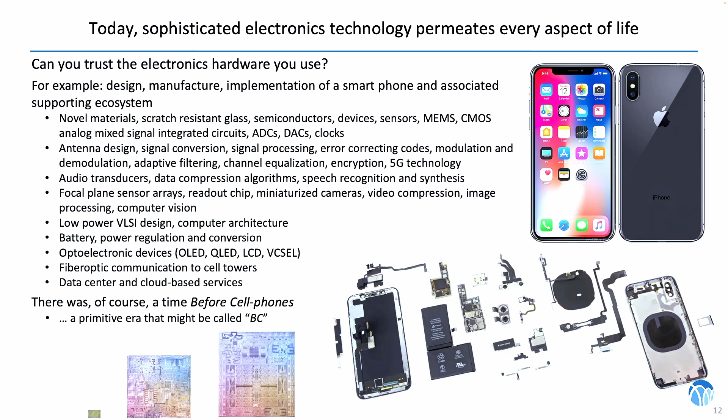So a lot of that is built on the success of integrated circuit technology. And so I show you in the bottom left-hand side here a little chip that's an example of leading edge circuit design that we did at USC, and next to it is the M1 and the M2 chip, also designed in leading edge technology by Apple. The larger chips contain billions of transistors.

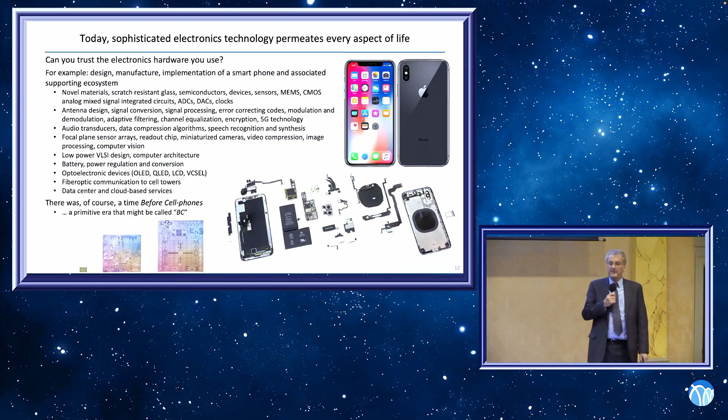And so when it's manufactured out on the Pacific Rim, how do you know that the manufacture has taken place according to your original design and that something else isn't in there? So that's going to be one of the ideas that we're going to pursue. And it's an idea that the government was interested in as well. And so we worked a little bit with them, but mainly we brought this forward in other ways.

So in terms of effort today, I want you to start understanding numbers. So length scales. To understand the sort of miracle of the state of the art in integrated circuits, you have to understand these scales. So human hair, which you can actually see, has a diameter of somewhere between 60 and 120 microns. Now you might say, what causes that range in diameter? Well, it depends on the color of your hair. So those of you who are interested can explore who has the larger diameter hair.

The human blood cell is about 5 microns in diameter. So you can't really see a single individual cell that easily. But larger cells are bigger. Now, let's look at something that is very important in technology, which is the glass fiber. So a silica glass fiber, this example here is a Corning single mode fiber, the SMF-28e+, which has got a 9 micron diameter.

That is the little 9 micron core, which is slightly germanium doped. And then the diameter of the actual glass cladding, the glass around it, is 125 microns. That's something, again, that you can see with your naked eye. And in fact, this particular glass fiber has been cleaved. You can see where the scratch mark was made, and then that fiber was cleaved. And then it was imaged in a scanning electron microscope, and that's the image that you see there with the 25 micron marker.

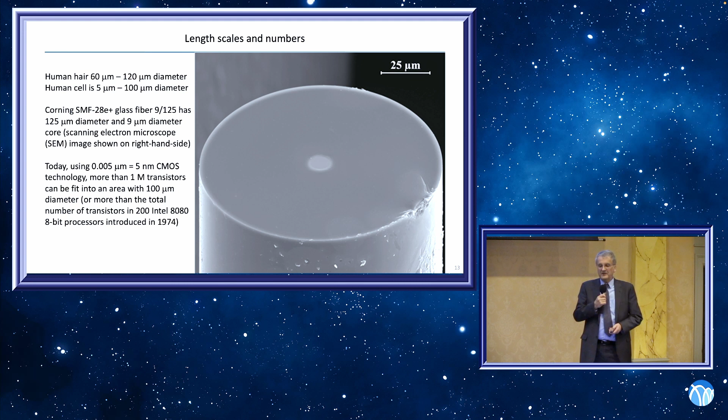So think of that. You can get 200 of those in that face, in that cleaved face of a glass fiber. It's awesome. It's absolutely awesome where we've come from in the technology. Here's another way of looking at it.

Along the horizontal axis, you see year on a linear scale, and up the vertical axis, on a logarithmic scale, you see minimum feature size of transistor. And so you see, when I started work at Bell Labs that Larry had mentioned at the introduction, the minimum feature size was 2 microns. This has decreased exponentially over 45 plus years, and now we have 5 nanometer minimum feature size transistors being produced, corresponding to 130 transistors per square micron.

Think of that little fiber and the core of the fiber, and then say do something that's 10 times less than the small, 100 times less area than that core you saw. I can fit 130 transistors in that.

On the vertical axis here, you see again, this is 6 micron technology that was used by Intel in 1974, had 4,500 transistors and a clock rate of 3 megahertz. And now there's been an increase in the transistor density of greater than 500,000, an increase in the clock frequency of greater than 1,000, an increase in the word length of 8. So you've got a 10 billion times increase in performance if you just multiply those numbers together.

From a national security point of view, in 2020, actually it was obvious many years ago, but the government finally woke up to recognize that the US, shown here with a little American flag, had a transistor density disadvantage relative to manufacturers that were very close to mainland China. And this turns out to be a threat to national security because you don't know what's going on in countries that are 60 times closer to China than the US.

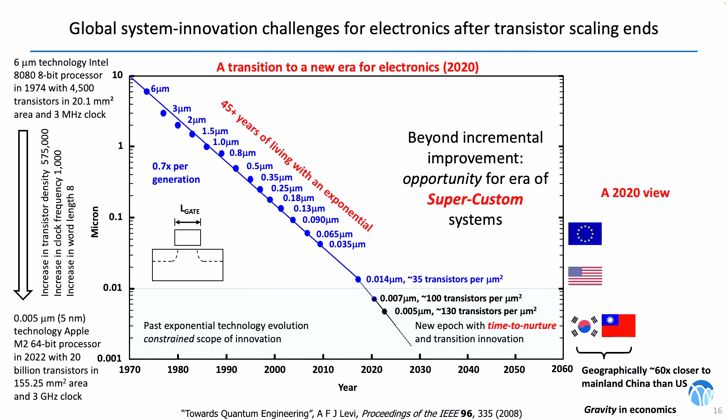So these were all concerns, and yet opportunities there to go beyond incremental improvement and a new era of super custom, where there's a time to nurture and transition innovation instead of it being crushed by the old paradigm of Moore's law. Now, given that background, do you trust the electronic hardware you use? You ought to be a little skeptical.

There's lots of opportunity for malfeasance. There's other types of technology being developed that you might want to investigate and reverse engineer. You'd like to understand more about what is going on 6,000 miles away. And it starts off on a larger scale. Here's a chip that is being packaged in Vietnam from Intel Corporation. And you look at the packaging.

This is conventional packaging, it's an Intel microprocessor, and you look at what's inside the package without opening it up, without destroying it. And this was work that was done in Switzerland using a medical imaging technology. The size of the voxels used was rather large, so the resolution was rather poor, but you could test at the package level that the connections were correct and that the various support components were in the right place.

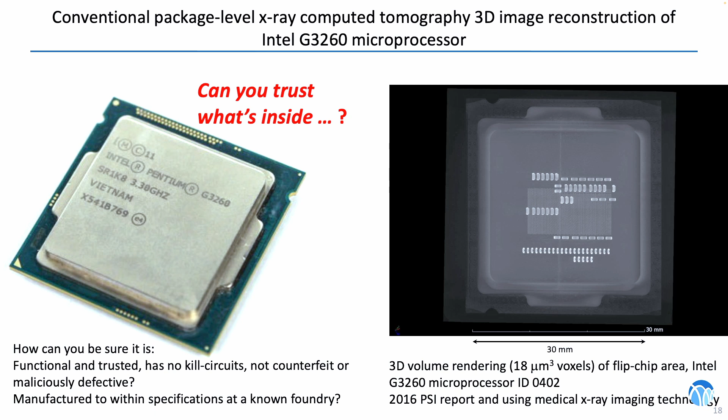So let's look at the conventional approach to discovering what's inside a chip. Let's look at a chip that's manufactured on the Pacific Rim, and it's a few millimeters on a side, and it's got some solder bump pads on the front surface. How do you find out what the metal interconnect layers are? How do you find out where the transistors are? How do you figure out whether it has been manufactured according to your design?

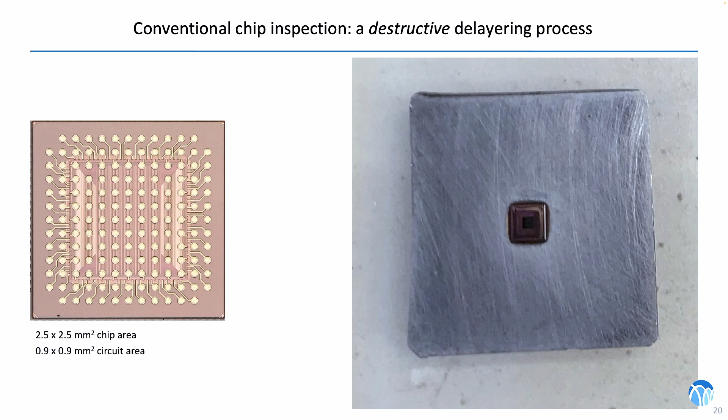Well, the way that's done currently is a destructive delayering process. You mount that chip that is on the left-hand side on a block, as you see on the right-hand side, and then you start grinding through the layers. So it's a destructive mechanical polishing to delayer the chip. The chip is made up of electrical conducting layers that are interconnected with vias. This is a slow process.

And you see here I started off with an optical microscope image of the complete chip, 2.5 millimeters on a side, grinding through those layers, looking a little closer where the solder bumps are, and you go through that, and you can look in the SEM, and you start looking at some higher level metal interconnect. Way down at the transistor level, just above the transistors, is the first metal layer of interconnect. Here it is.

You see those railroad tracks running horizontally from side to side? They are 500 nanometers apart. And then the little connections that you can barely see are connecting individual transistors. That's called the M1 layer, metal 1 layer. The next layer up is called M2, and so on. There's M7 shown.

The problem with this is you have a chip, and there's only one shot at getting this right. You mess it up, that's it. You can't go back and reinspect. Oops, I was more interested in this. I want to find out what happened. Too late, it's done.

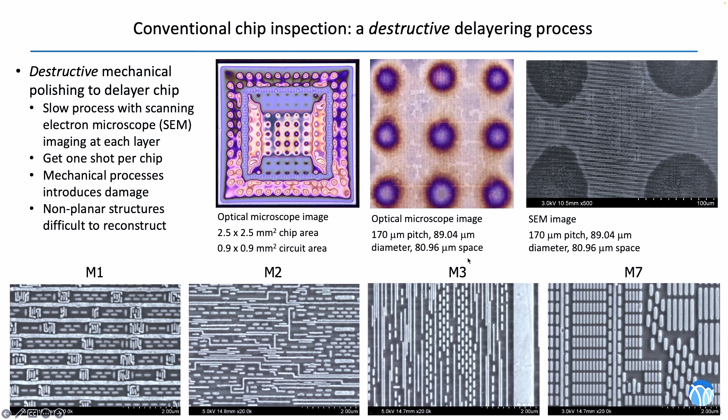So this has lots of negatives associated with it, including you can't go back and redo, and that as the minimum feature size gets smaller, the metal layers get thinner, and so you don't have these pretty pictures anymore. You have to reconstruct pieces which are not planar surfaces, and they go up through multiple layers, and that becomes a real bit of a nightmare. So this destructive delayering process is not optimal. It's slow, and for non-planar structures, such as the more modern transistors, it's very difficult to make the reconstruction.

So what we want to do is a non-destructive chip inspection using, in this case, coherent X-ray 3D imaging. So we can look in 3 dimensions at what is actually being manufactured. And let's see if we can do that. Well, yes, of course we can. This is an efficient way to do it, and we want to get down to 1,000th the scale, the resolution that we were using before. So it's a big step, and this work was published a couple of years ago. I'm going to show you in a little while.

This is a work that involved putting together an incredible team of people. I can say a few words about that. Finding the humans and the resources to do this is actually a delicate task. I spent a good part of 2016 traveling around X-ray facilities in the United States and abroad. And after interviewing a number of engineers, came to the conclusion that a national lab in Switzerland was the best choice for our team to work on this project. And it turned out to be very good. So Mirko and Manuel were key members of that team in Switzerland.

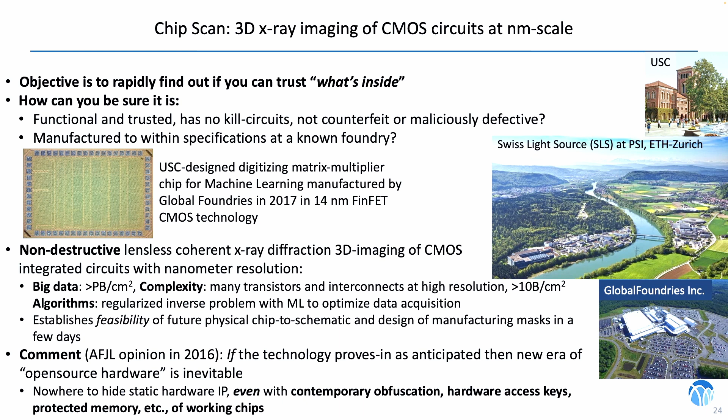So in understanding the next steps, let's start off with ptychographic 3D tomographic reconstruction. A lot of fancy words for something that I'm going to hopefully explain rather easily. The traditional way this type of X-ray imaging is done, you have a coherent beam of X-rays, which you focus onto a sample, and the sample is shown here. In this case, you have cut out a 10 micron diameter pillar, and you can see here some metal layers for a rather legacy technology system.

And you run the X-rays horizontally through these layers, and you rotate the sample with the beam fixed, and you collect diffraction patterns. So the coherent X-ray beam diffracts from the metal layers and produces an intensity pattern that is picked up on a focal plane array of detectors, that is the diffraction pattern that you see here. So the diffraction pattern at the detector is the two-dimensional Fourier transform of a projection through the sample and corresponds to a cross-section of the 3D Fourier transform of the whole object.

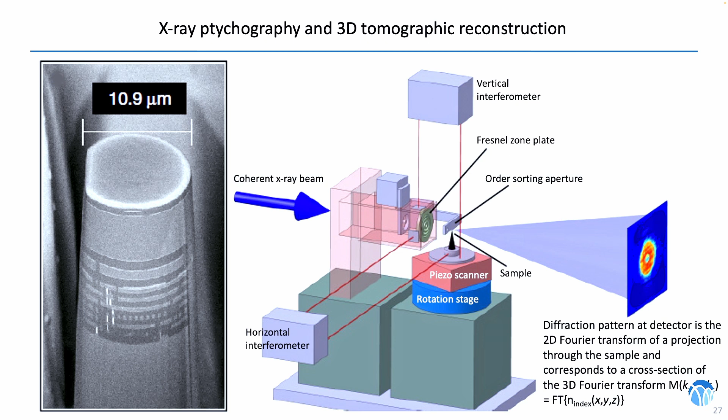Now, the challenge of reconstructing the image of the 3D object is the challenge of finding the field and the phase at this plane just given the intensity data. And so this is an inverse problem, and the only way to proceed is to take many such images and rotate the sample and collect the corresponding data, and then do the inverse problem on this.

So while you're thinking about that, let me show you something in Global Foundries technology that we started working on. So this is showing a similar cylinder, but this happens to be something from Global Foundries. The design is shown here in 3D. So the design is made up of photolithographic mask layers, showing here the first few layers in the process of manufacturing a chip. You start off at the bottom and you start working up. And I'm just showing layer 3 through 10, where layer 10 is the M1 layer, the first metal layer above the transistors.

You can synthesize all of this and model it by taking the mask layers, knowing the thickness and the materials, and figuring out what the 3D object should look like in a model. We haven't done any X-rays yet, we just created a model. And we're already working quite hard, in case you're worried.

It turns out it's a certain type of circuit for testing. For those of you who know about circuits, you'll recognize this immediately. This is the metal 1 layer in the photolithographic mask, and if you take this cut in red and you now plot it out in 3D on the right-hand side, you see what the actual metal in yellow looks like in 3D, and lying below are other parts of the process, including implantation and so on.

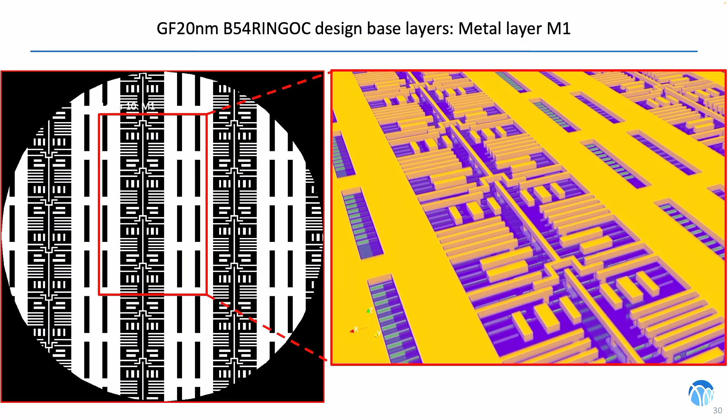Now, we can do a fly-through through this cylinder of the synthesized object, and this is what it looks like. So you see I can fly in like an architect flying through a new design. I can fly in through my design in 3 dimensions and look for those patterns of metal interconnect on the first layer, and I can see them.

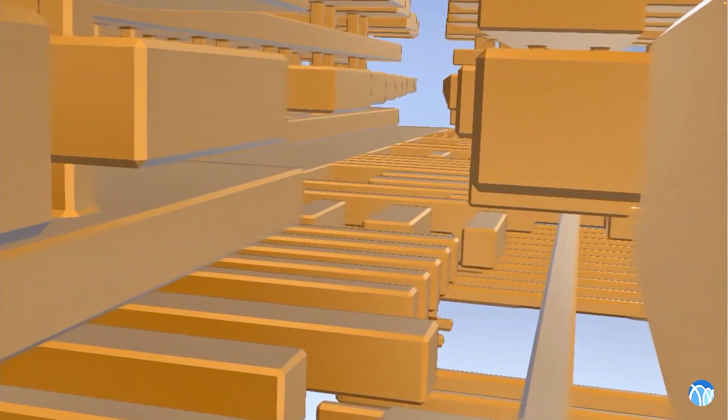I hope you can see them. It may be you think of the Jetsons or something in some cartoon, but this is actual 3D rendering of a design of a transistor circuit. Not the measured case, but the design.

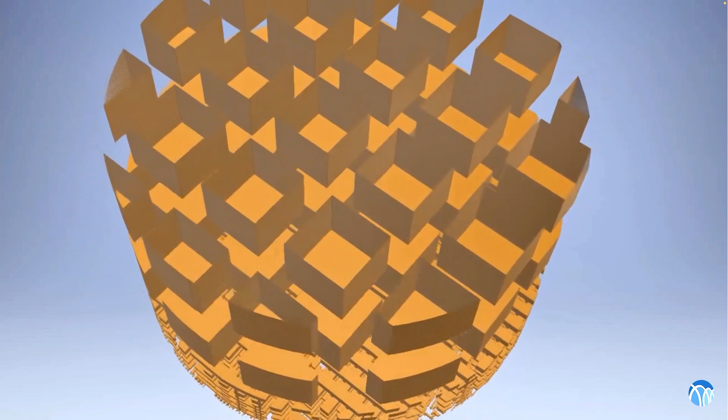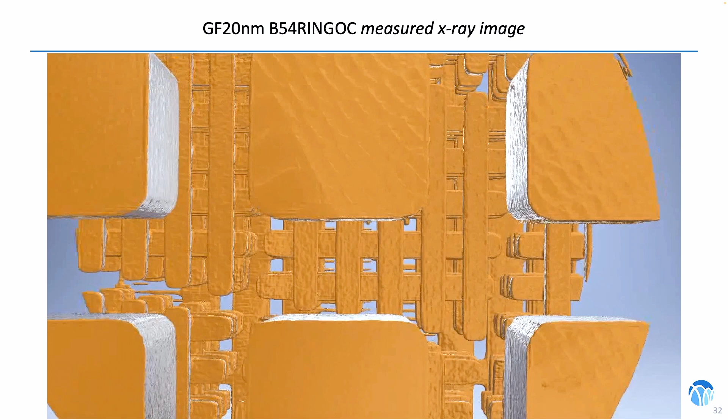So knowing what the design in 3 dimensions should look like, we now want to go away and measure it using X-rays, using the established method that I had shown you before. And so this is the result of that inverse scattering problem, showing you a fly-through through the same thing. So we go through the upper layers, we dive down towards the lower layers.

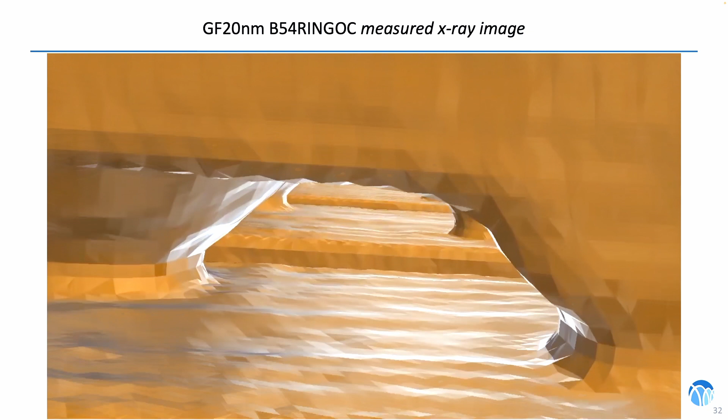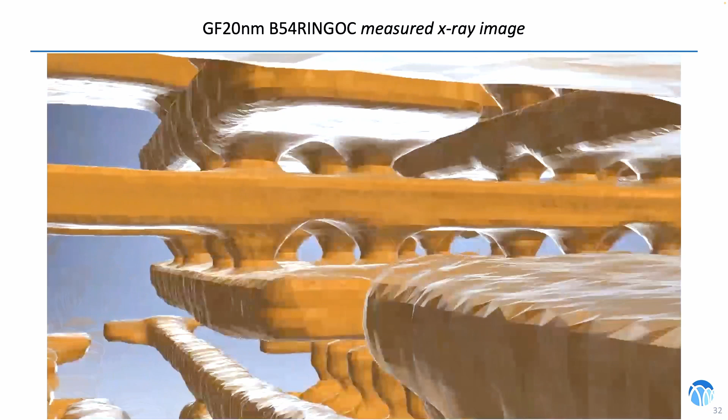You look to see the vias connecting metal interconnects. You see those vias, and eventually you get down to the metal layers; this is the metal 1 layer. I, of course, recognize it. You may not. And given our proximity to Hollywood, you can imagine at USC we had lots of fun figuring out how to generate these videos from the X-ray data after we had done the inverse problem.

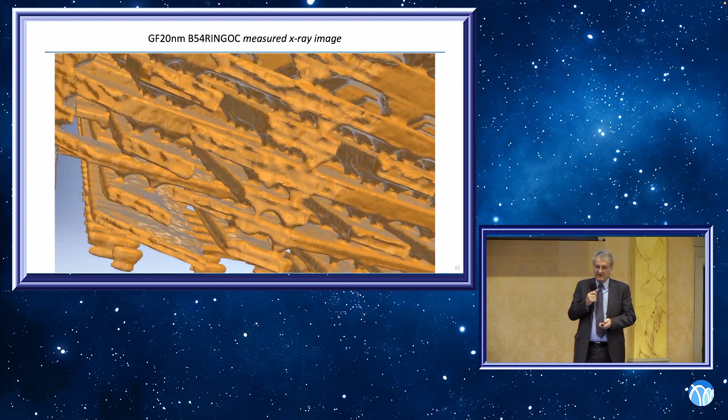So this turns out to be the copper metal interconnect in a circuit from Global Foundries, manufactured in a 20 nanometer process that we have there. So not only can you get the 3D image, you can then slice through it and reconstruct the photolithographic mask by taking a layer, in this case the M1 layer, and reproducing the mask.

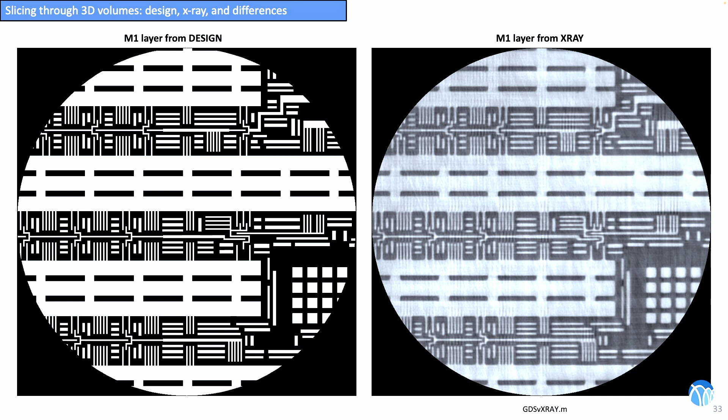So on the left-hand side, you have the photolithographic mask. On the right-hand side, you have the delayered, imaged M1 layer that's actually been manufactured, and you can look at the difference. You have the design file, and you have the imaged data, and the little red lines on the left-hand side are where the boundaries ought to be according to the design, and the black and white is where it's actually measured, and the difference file is shown on the right-hand side.

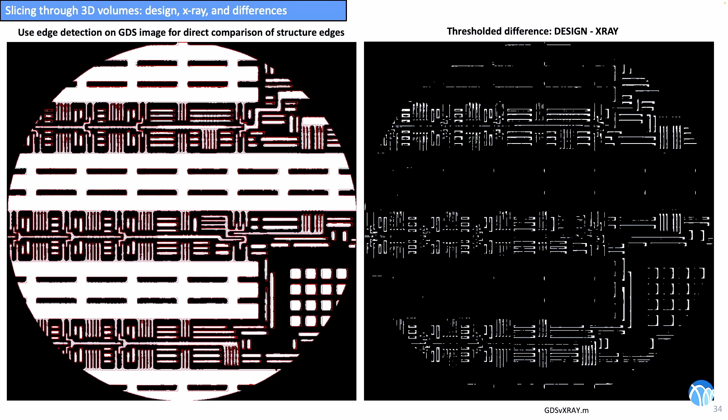So even at the M1 layer, there is a difference between your design and the manufacture. So we're making progress. We haven't got there yet, but we're making progress. So we can pause at this point, and you say, well, I've got a technology now that enables a sort of certified trust. I could randomly sample chips, put them through my X-ray imaging system, and I could issue a certificate. Yes, this chip actually has been manufactured according to a certain standard that we might decide on.

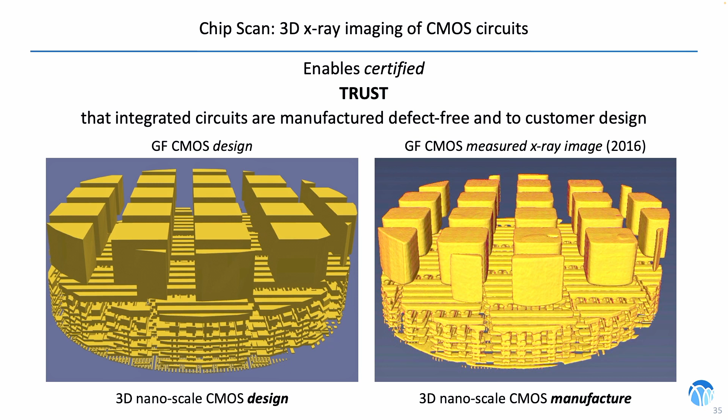So on the left-hand side, you see the 3D nanoscale rendering of a CMOS design. On the right-hand side, you see what was actually manufactured. So we're doing good so far. So this was back in 2016, but it's not quite there yet. We need to learn more, and we need to deliver more, in particular, scan larger areas. So that was Global Foundries.

So let's have a look at Intel. So instead of going to Intel and asking Intel for a chip, we just went to a local store, paid $50, took one of their microprocessors, and imaged it, and said, what can we learn? This happens to be a 22 nanometer FinFET technology. The answer is you can learn an awful lot.

You see here at the bottom of this image is the copper interconnect for the transistor layer M1, and then you build up this hierarchy. This is the reconstructed X-ray image. You see the length scale shown here, 500 nanometers. You get an idea of what we're dealing with. And you can fly in and have a look at the quality.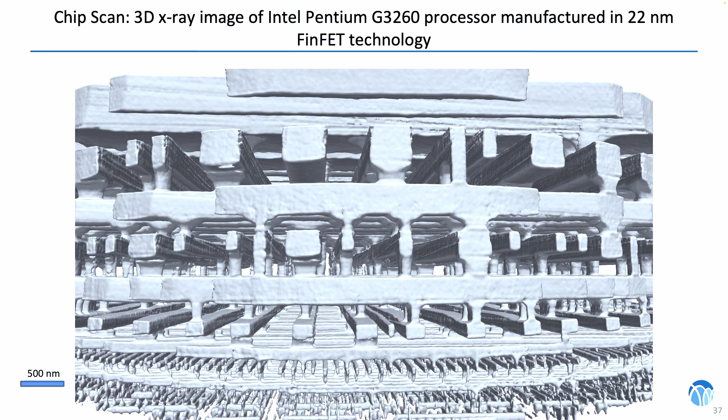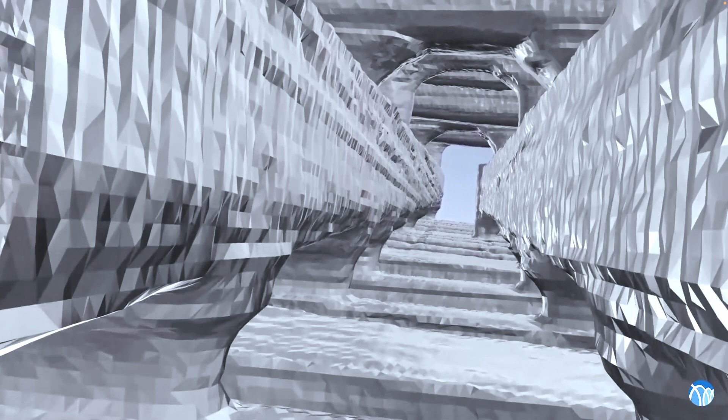Remember those vias that I showed you before from GlobalFoundries? Well, let's see how Intel does on those vias. And let's fly through. So we go on a trip. Those vias from Intel have beautiful straight sidewalls relative to what we saw before. The surface roughness that you see on the metal interconnects is very good, very low. And I can fly down through this structure and explore in a sort of virtual reality view of what was actually manufactured.

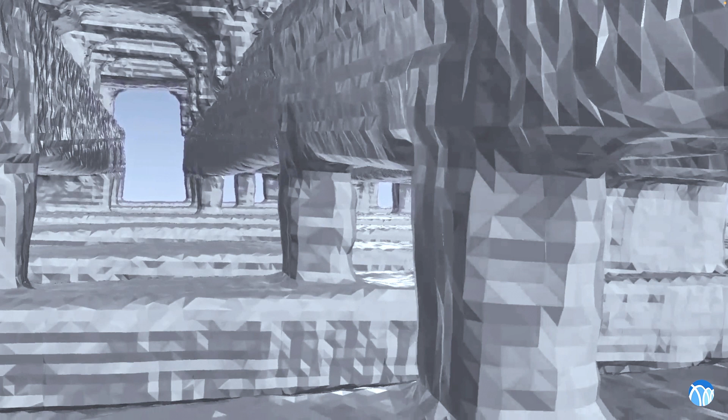So absolutely fantastic. And it turns out that these different manufacturers, and I'm going to show you another manufacturer further on, leave behind a type of manufacturing fingerprint. I can figure out where this came from. I can figure out something about the quality of engineering that's going on. It turns out that there are things about this Intel chip that the other manufacturers we looked at did not take into consideration. There's a lot of knowledge here that you're accumulating by what? Just doing X-ray imaging.

So let's look at some detail in what is currently state-of-the-art FinFET CMOS technology. Let's learn something about it. So again, from a design file, this is a measure of the complexity. Remember, now we're back into a design. And so this isn't the imaged chip, that's coming later. This is the design rendered in 3D, a little cube of 4 and a bit microns on a side.

And you can see on the right-hand side that the thicknesses of the layers are down in a few tens of nanometers. You have vias that are, let's say, 30 nanometers, metal layers that are 60 or 70 nanometers. And down at the bottom, way down at the bottom, you have the actual transistors. So this sort of connectome, how you connect the transistors, is part of the intelligence of a circuit, and is encoded in this metal interconnect. And we want to explore that. And you can see the different length scales shown here in the vertical, in this rendering.

There's also the material properties, which I'm sort of not spending much time on, but there are many different materials used in design of a circuit. There's tungsten, aluminum, copper for the metal interconnects that we've been looking at, silicon dioxide, various dopants, and so on. All of these can be explored and measured using X-rays. Lots of wonderful things about X-rays, but I'm not going to dwell on that very much. I'm really going to stick with the sort of geometry aspects of this.

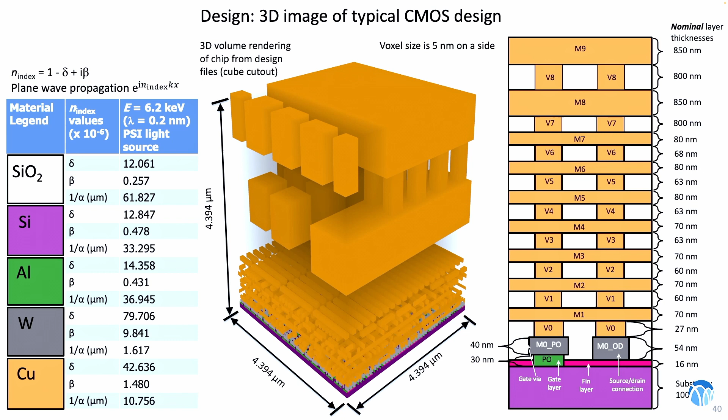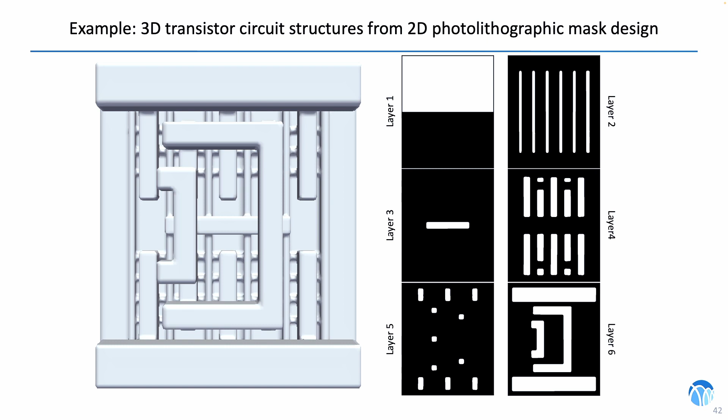Before we get too excited about that, let's look at a simple circuit. This is a 3D rendition of a design. The design mask is shown on the right-hand side, and the 3D rendering of that. So the 2D photolithographic masks are an abstraction of the 3D manufactured part. So the 3D design is shown on the left-hand side, and the 2D abstraction is shown on the right-hand side. So I'm creating the 3D from the 2D.

And then I can color it in and tell you what the metal layers are, and then I can figure out what the circuit is. So I can do reverse engineering, and so this happens to be an inverter. There's a schematic diagram on the right-hand side, which is another abstraction, and there's the 3D rendering of that actual circuit as designed to be implemented.

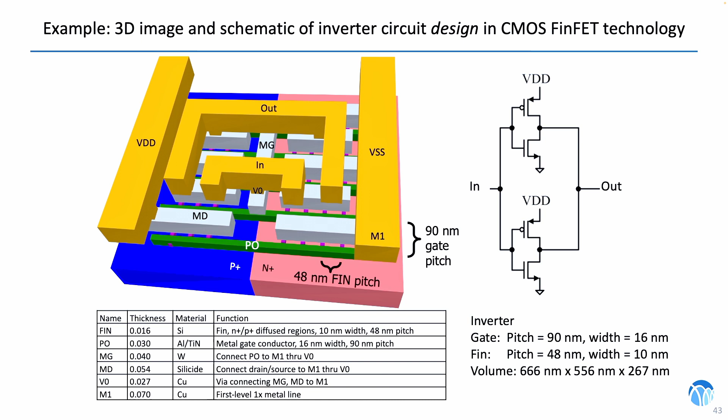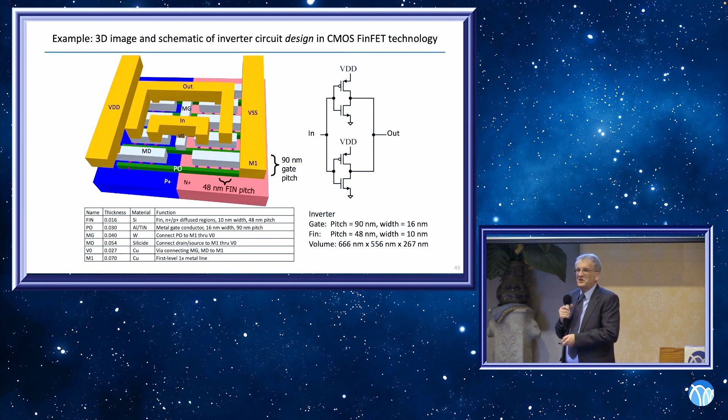This is FinFET technology and you can see there's a 48 nanometer pitch, and there's a 90 nanometer gate pitch, and then various assignments for various dimensions, including, even though this is a 16 nanometer technology, quotation marks, there are actually features in here that are 10 nanometers, and there's actual physical objects in there that are controlled to deliver things that are 6 nanometers. So even though the manufacturer is advertising this as a 16 nanometer process, there are other things going on that have much greater control than you might have expected.

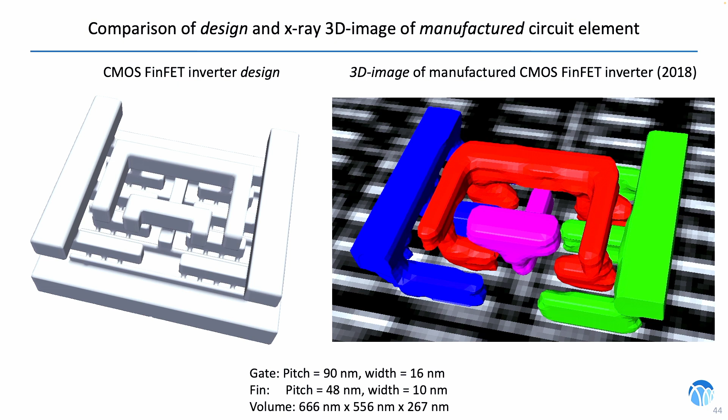Now you can see on the left-hand side the design in 3D, and then on the right-hand side what the X-ray imaging delivered in terms of that design, colored to tell you how the electrical connections are made and what the function of that circuit is. So you can see reverse engineering is just sitting there waiting for you with this technology.

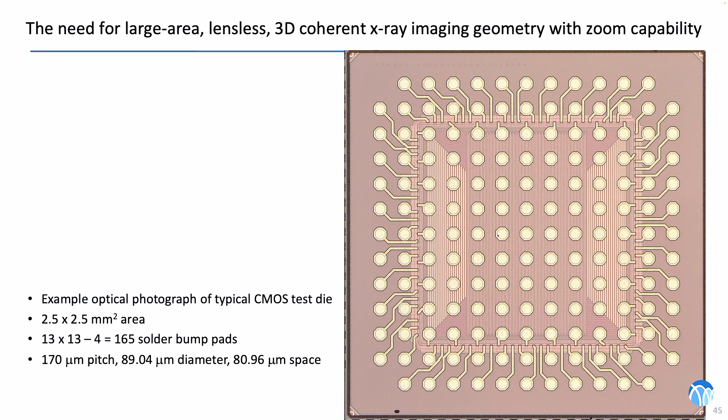Let's go back and assess where we're at. We actually are missing something. We need to be able to measure large areas, because chips are large, they're centimeters in size, and they're built by a layered process. I haven't shown you how to do that yet. So now comes the next hard part of the talk. We've got this example, this optical photograph of a CMOS test die that I was showing you before. It's got 165 solder bump pads, and it's got a certain pitch and so on.

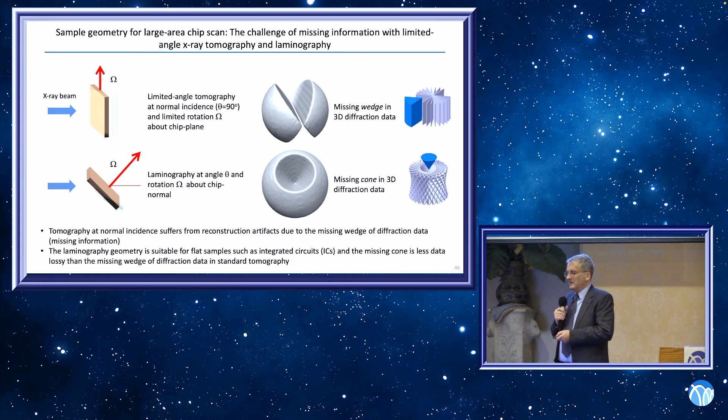Now, for a large area, you've got this small X-ray beam that you need to scan across the surface and collect the diffraction patterns. And you can do this in 2 ways. You can take the chip sample as shown in the top piece here, and you can rotate it about this axis, omega.

The problem with that is, as you rotate the sample relative to the X-ray beam, eventually the X-rays cannot penetrate through the chip, and you end up with a limited rotation angle that you can use, which means that you end up with a missing wedge of diffraction data that is shown here. So the image slices that you take in the Fourier transformed plane, you see these slices, you get multiples of them, but there's a piece that you can't access that's shown in blue.

So there is actually a known, better geometry called laminographic geometry. So laminography, where you have to choose an angle with respect to the X-ray beam, and then you rotate around that angle, and finding that angle, the optimal angle, is also a challenge. But you end up not with a missing wedge, but with a missing cone, which means you lose less data. So that's where we're headed.

And choosing that angle and how to make this all work, you again go to simulations before you commit to design. And so I wanted to show you a little bit of that. I'm showing you how you can visualize this. The chip is shown here. The X-ray beam comes in, and you can see the angle. And then you're going to rotate this around the z-axis, which is the normal to the plane of the chip. You can rotate omega here. Now, this is actually a synthesized chip, so it's a design.

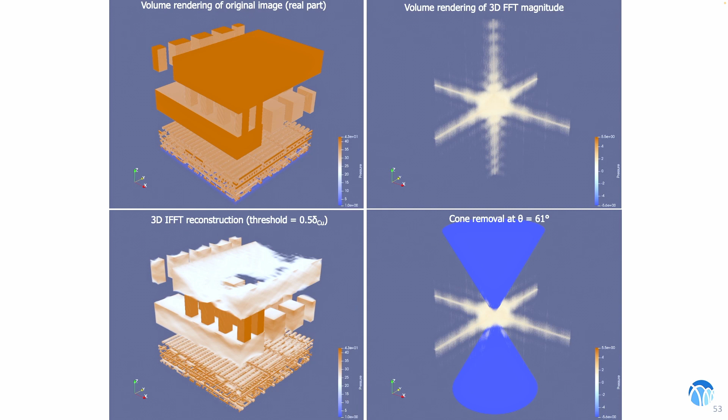Here it is again in 3D, the 3D Fourier transform of the original image and with the cone removed. And you can see how the information in the Fourier transform has been removed and how it's impacted the image. So it turns out that small features are very well represented and large flat objects are not.

So this is a very interesting case where if you do an image reconstruction where you say, I know that this is a planar object, if I don't see the diffraction peaks for small objects, then the object must be flat. So it's one of these cases where if you don't see it, you know that it's there. Think about that.

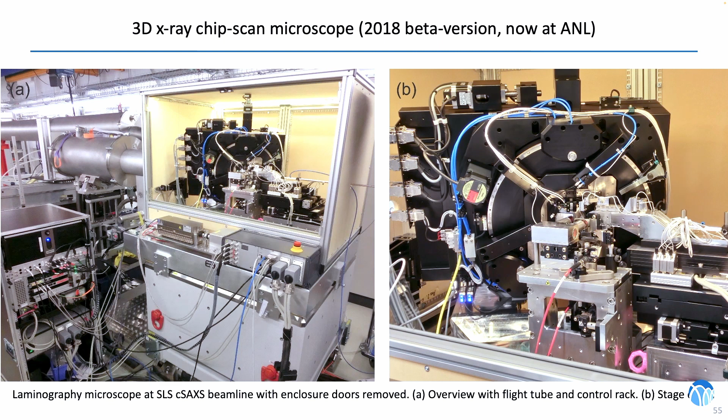So sort of finishing this up a little bit, the 3D X-ray chip scan microscope: a first version was built in Switzerland. Here it is. You see it involves a lot of mechanical work as well as very precision motion stages, and a great deal of experience goes into getting this design right. And that was one of the things I was looking at in 2016, the people and the quality of the effort.

This particular machine has been purchased by the US government. It is now at Argonne National Lab. There is another version of this machine that continues to work and do good work in Switzerland.

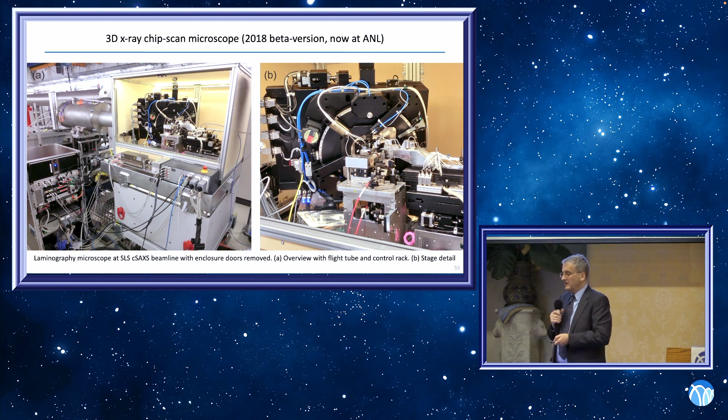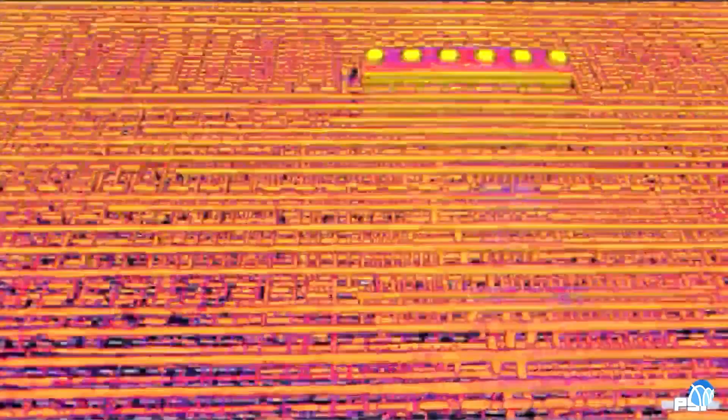It goes through those layers, this sort of connectome, and goes down to the lower layers. And there's your M1 layer with the railroad tracks about 500 nanometers apart. Now we're going up through the layers and then back down again. And then we're zooming in on that inverter design that I'd shown you before.

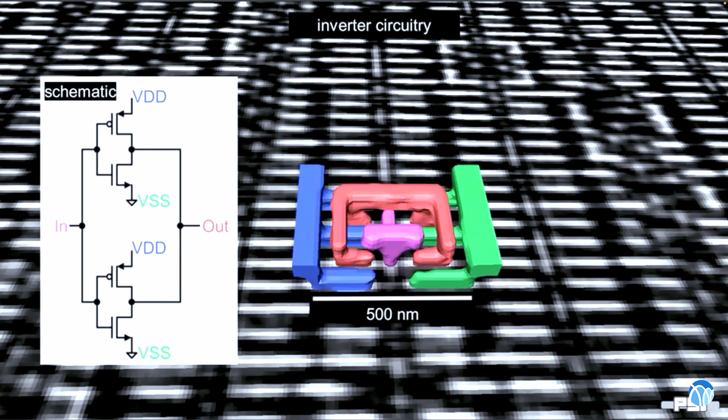And you can then build a schematic out of what you're seeing in 3 dimensions here and say, there you go, that's the electrical functionality of that versus my 3D rendition from the original design. And now just doing everything backwards, going back through the chip. You might ask what all these layers mean, and I can explain some other time what they're there for, what function they perform.

The point is that on this large scale, you can have a microscope that looks inside the chip in 3 dimensions and tells you what was manufactured relative to the design and tells you what the circuit function is in the system. That's pretty good.

Looking back at the M1 layer, it's sort of extraordinary to me, so I love this movie, that you can see in 3D, virtually delayer down to the M1 layer and look at that. You're just flying through the circuit design of the actual manufactured part of that M1 layer. It's like, wow. And you can go back and look as many times as you like later because you haven't destroyed the chip. It's sitting there waiting for you. So that's beautiful. And here's another picture of it because I love it so much. It's my baby.

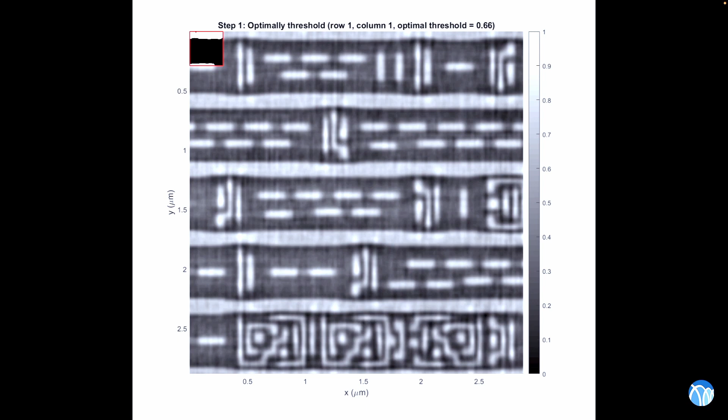Now, you can take that M1 layer and say, let me look for features that are not supposed to be there. So let's look to see what it is. I do some image signal processing to threshold the delayered X-ray image. And then I check first that the topology is correct relative to the circuit design. It's a very important step.

And then I go in and say, well, is this actually what I designed? You notice it's not very straight lines. It's got sort of defects. That's all to do with the quality of the manufacturing. And there's a lot you can learn about the instruments used by the manufacturer and the quality of those instruments, the processing. We can say more about that.

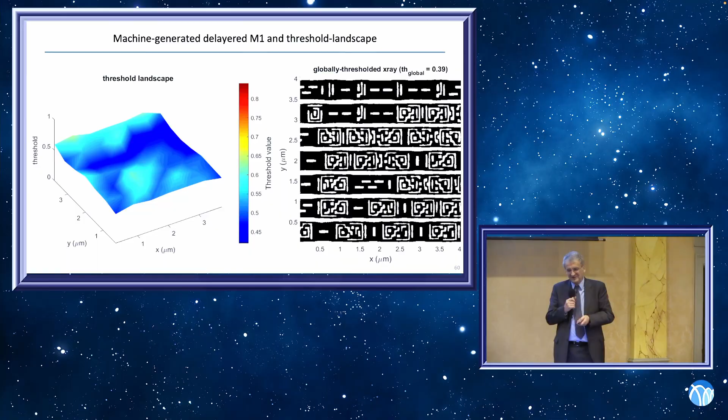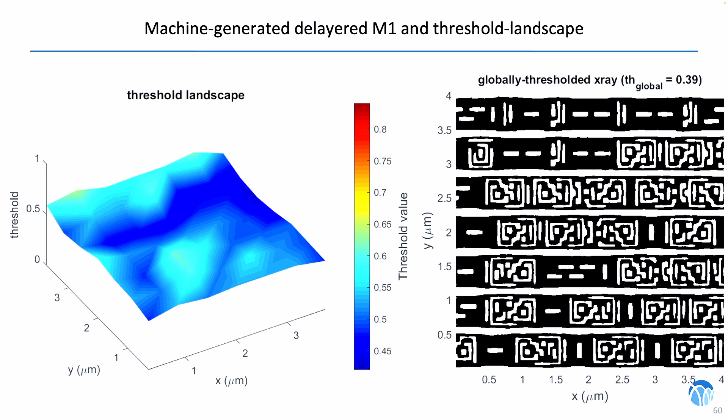So you can do machine-generated delayering of the M1 layer and look at the threshold landscape you've got here, and then you can put in a defect deliberately and see if it'll detect it, and of course it does. So you have a way of verifying design and manufacture.

So let me just finish up on this statement. Again, the team is very important. I've got a method of pursuing trust. I wanted to emphasize just what an extraordinary achievement it is to have this ability to control manufacturing at the nanoscale, which is what gives us the electronics that we have today.

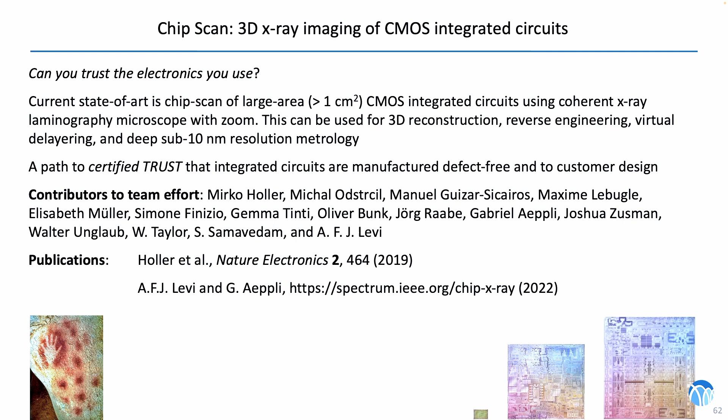On the left-hand side, I show you a handprint from 27,000 years ago in a cave in France, where a human achievement was the beautiful art done in those cave paintings. Since then, we've had language, theater, music, mathematics, and I want to add to the list nanoscale manufacture of chips with billions of transistors per square centimeter, a technology that has elevated us into a new realm. That's the end.